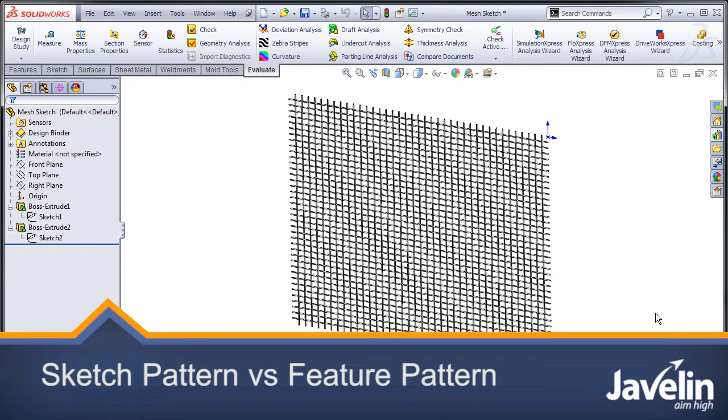I've gotten myself into another fine mesh. I have 1 square meter of meshing here. It's 25 by 25 mil squares, 3 mil wire diameter, and it's 1 meter by 1 meter. I'm making some guarding for a machine that I'm building, and I want to have this wire mesh. But if I go under statistics here, what I find is that my rebuild time is almost 3.5 seconds.

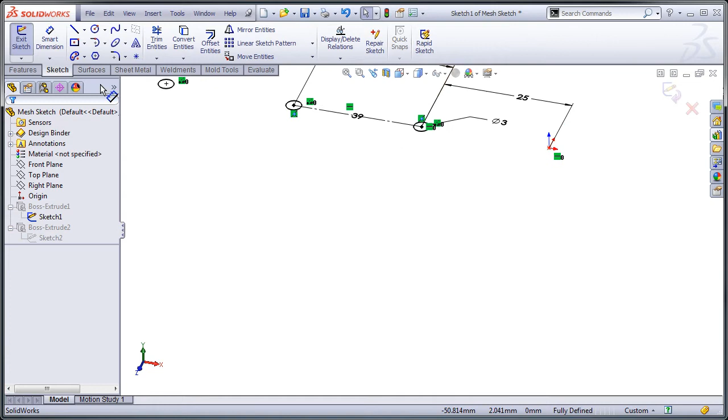Now I've used a sketch pattern for this. Basically what I did, if I edit my sketch here, I sketched in a circle and I did a linear pattern on that. And when I go to rebuild, you'll notice that the rebuild time is in fact 3.5 seconds. So I'm wondering if maybe my sketch pattern is the reason that this is taking so long. So I'm going to do the same thing but with a feature pattern instead of a sketch pattern.

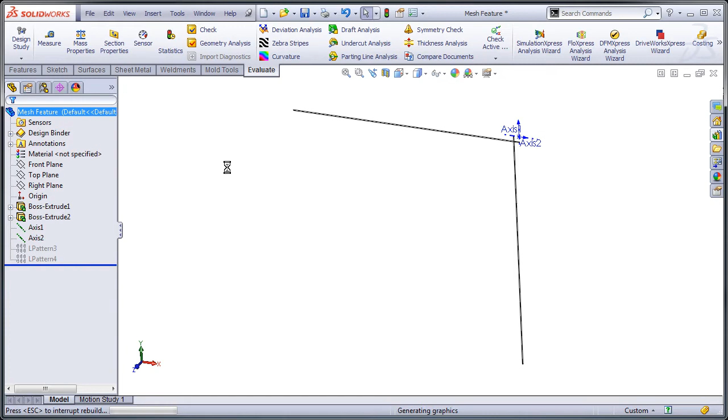Okay, I'm back and I've created my part once again, this time using a linear pattern. If I roll back to before those, you'll notice I've got 1 piece, 2 piece, and then I've got my linear pattern. Doesn't look so good. Let's see what the statistics say. A little bit of improvement, 2.29 seconds. But there's got to be a better way. I'm still going to be there for quite some time if I have a whole bunch of these mesh panels. This is just 1 square meter.

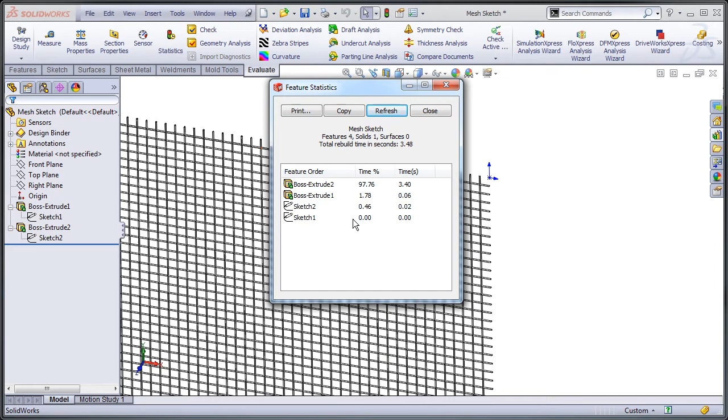Let's go back to my other one, and let's see what the breakdown is. If I look at my feature breakdown here, what I can see is that Boss Extrude 2 takes up the lion's share of that. Now, why the heck is it taking so much longer than Boss Extrude 1? They're basically the same thing, right? All it is is a sketch with an array of holes that I'm extruding 1 meter.

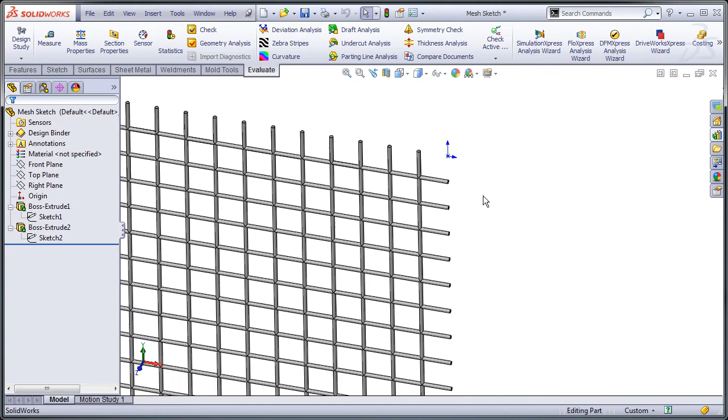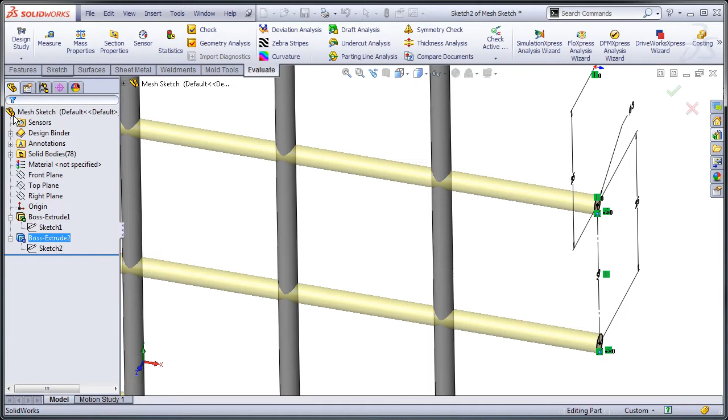But if I zoom in, I can see all these curves here that are being generated as a result. And I also only have 1 solid body. It's because I've turned on merge result. Let's try turning that off and see if that makes a difference. Get rid of merge result. Okay. So now it's ignoring the fact that there's an intersection there. For the purposes of my machine guarding, it's not going to matter that I don't have those edges because I'll never use them. So now let's see when I rebuild.

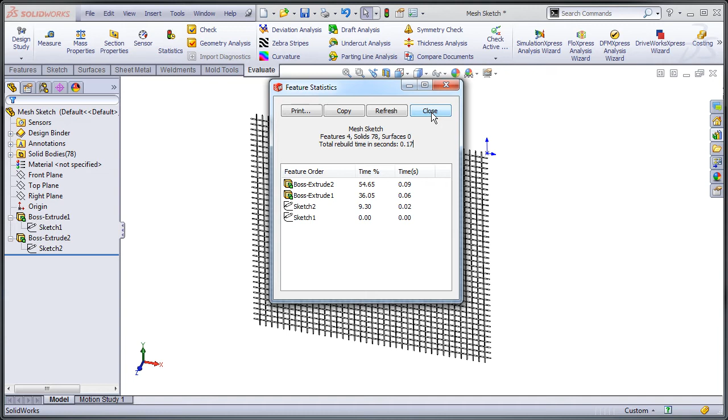Whoa, look at that. 0.17 compared to 3.5. That's a huge improvement. But I'm kind of wondering whether or not there's a way I can get that even lower. That's 0.17. I guess that's probably alright for 1 square meter, but if I had a whole bunch of these, this could quickly add up to say 1 or 2 seconds. So perhaps there's a quicker way.

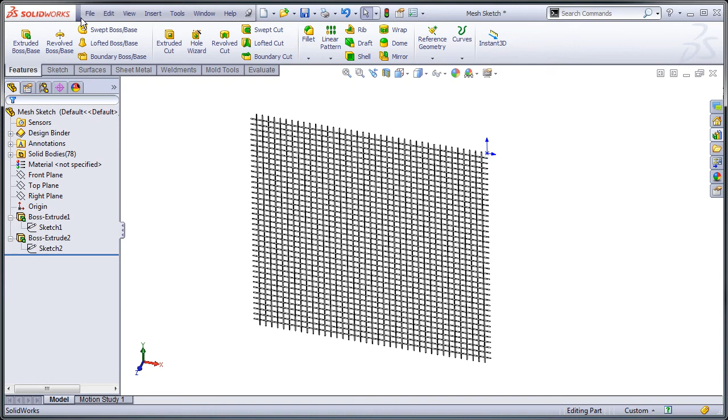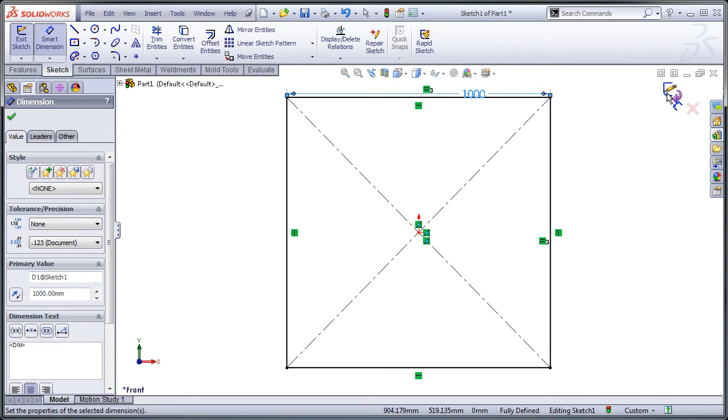So I'm going to create a new part. To make these equal, I'll make it 1 square meter. Now I said earlier it was 3 millimeter wire diameter, so I'm going to make it 3 millimeters thick. But this is just a square panel. Now if I go up to my statistics here, you'll see that it takes quite a bit less. There's barely anything here.

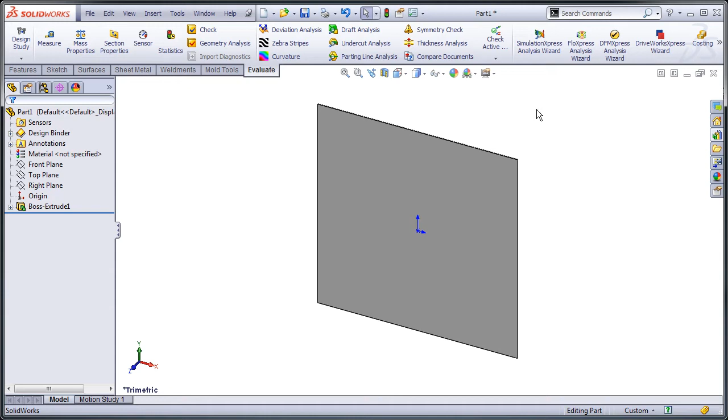So I'm going to try applying a texture to this. I'm going to turn on RealView Graphics here, just in order to get that effect going on. And now if I go under Appearances, I know there's one under Steel, which is a chain link fence. Oh, there it is right there. So I'm just going to drag this and drop it.

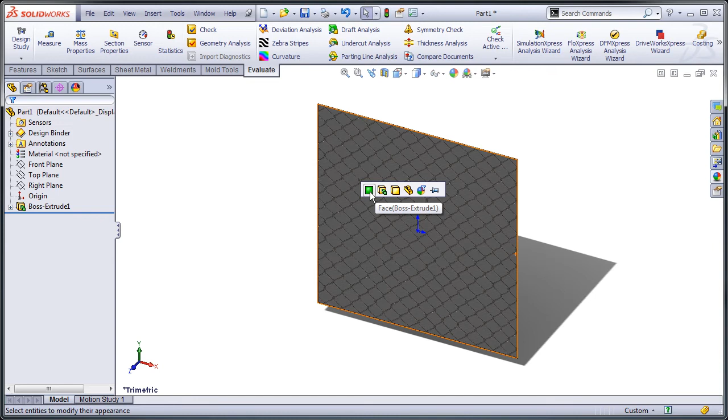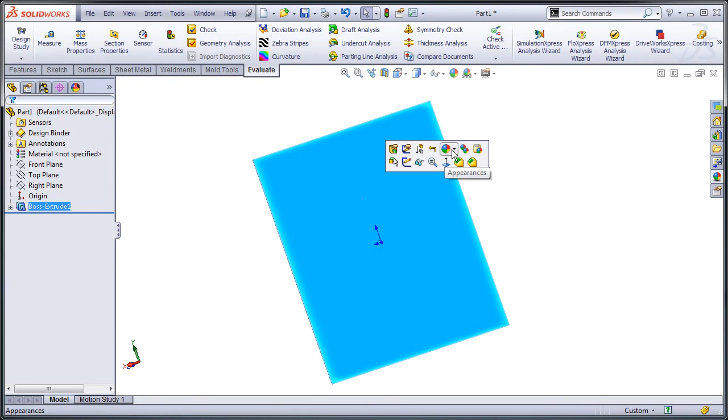Now I'm only going to apply it to the face, because otherwise if I apply it to the body, if I zoom in, what you'll see is that there's actually a chain link fence on the front face and a chain link fence on the back face. So I only want this on the front face because otherwise I'm going to end up with 2 chain link fences, and I don't want that. I'm going to go around to here, and I'm going to get the appearance of this back face.

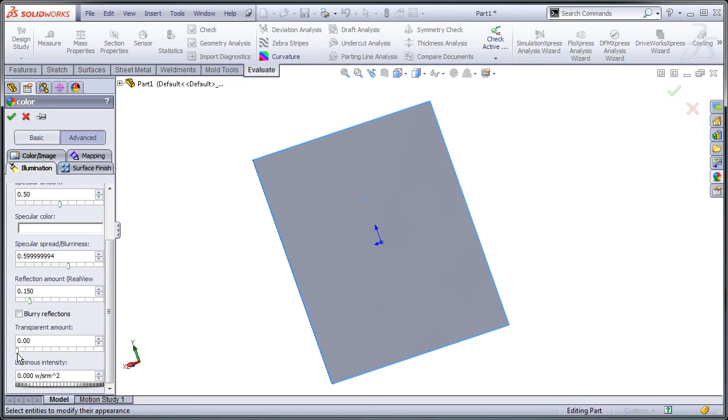And if I go under Advanced here, I can find transparency somewhere. Where is it? Illumination. There it is. It's under the Illumination tab. I'm going to scroll this so it's completely transparent. And that's just the back face. Now, I'm not looking for a chain link fence. I'm looking for the same mesh pattern that I had before.

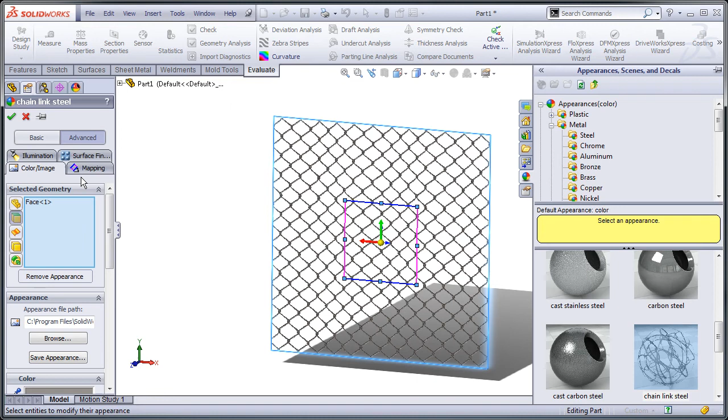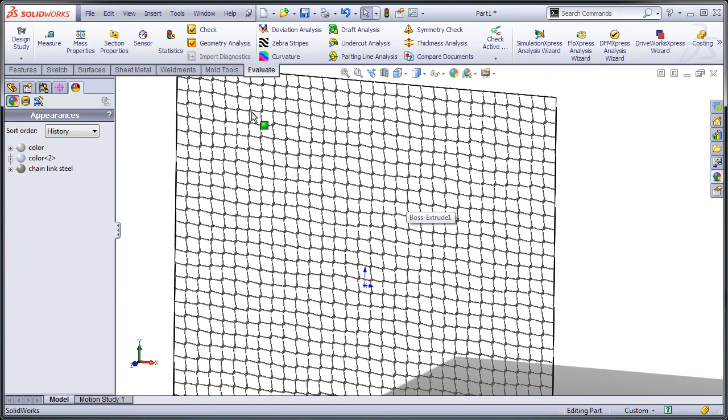So I'm going to edit this appearance here. And if I go under mapping here, you'll see that I can modify some of this stuff. So if I made this, say, 45 degrees, now it's going up and down. And I can shrink this until it looks like it's roughly the same size as it was in the other model. And now if I do a quick rebuild and check my rebuild statistics, you can see that it's even better than the 0.17 that I had before.